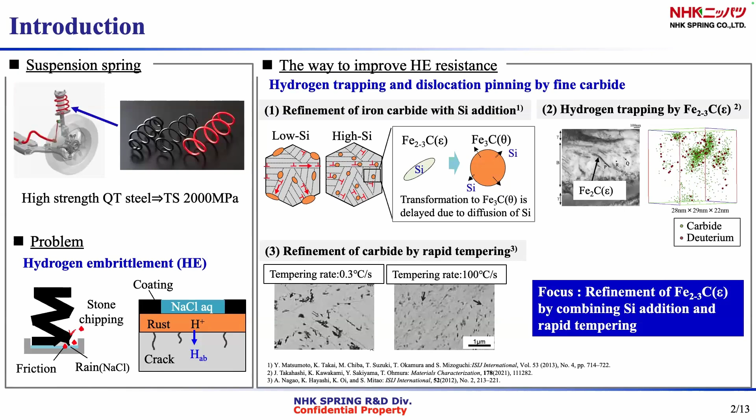Suspension springs have been required to be lightweight to reduce CO2 emissions. Springs use high-strength martensitic steel with tensile strength of 2,000 megapascals. The problem of the spring is hydrogen embrittlement due to corrosion. One of the ways to improve hydrogen embrittlement resistance is hydrogen trapping and dislocation pinning by fine carbides.

We focus on the epsilon carbide in this study. It is known that when silicon is added in steels, the carbides finely precipitate within grains. Silicon is said to delay the transformation from epsilon carbide to cementite. Recently, it has been reported that the epsilon carbide may have hydrogen trapping ability. Additionally, the carbides have been refined by rapid tempering. Therefore, we focus on the refinement of epsilon carbide by combining silicon addition and rapid tempering.

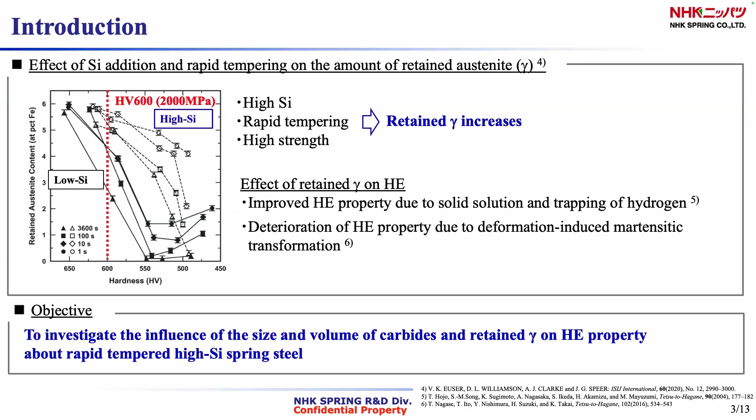On the other hand, it has also been reported that the amount of retained austenite increases when silicon is added and rapid tempering is performed. The effect of retained austenite on hydrogen embrittlement includes improvement in its property due to solid solution and trapping of hydrogen, or deterioration due to deformation-induced martensitic transformation. Therefore, the objective of this study is to investigate the influence of the size and volume of carbides and retained austenite on hydrogen embrittlement property of the rapid tempered high silicon spring steel.

Now I explain the experimental method. Two types of spring steels with different silicon content were used. The heat treatment is shown here. In order to eliminate the grain size differences, induction heating, IH, was used for quenching, and IH and furnace heating, FH, were used for tempering. The specimens were three types of steels with different silicon content and tempering speed. Although the grain size and hardness were the same, the Charpy impact value tended to be highest for

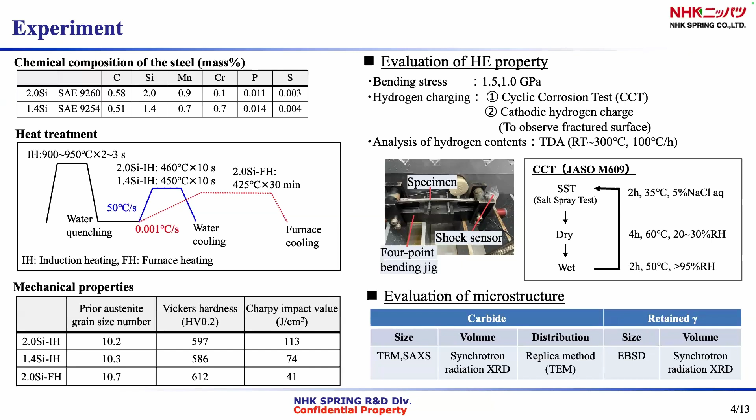the two silicon IH steel. In order to evaluate the hydrogen embrittlement properties, a 4-point bending test was conducted under a cyclic corrosion test. The fracture life was measured by detecting the electrical signal output when the specimen fractured. The cathodic hydrogen charging test was also conducted, and we observed the fractured surface. The size and volume of carbides and retained austenite were measured using X-rays, synchrotron radiation, the replica method, and EBSD.

I will move on to the results. This is the result of the hydrogen embrittlement property of each specimen. It was found that the two silicon IH steel has the longest fracture life. At the same tempering rate, high silicon steel has a longer fracture life than low silicon steel. At the same amount of silicon added, IH tempering increased the fracture life by 2 to 10 times compared to FH tempering. And the two silicon FH steel fractured in a short time. Therefore, it was expected that there would be a large difference in microstructure compared to IH tempered steels.

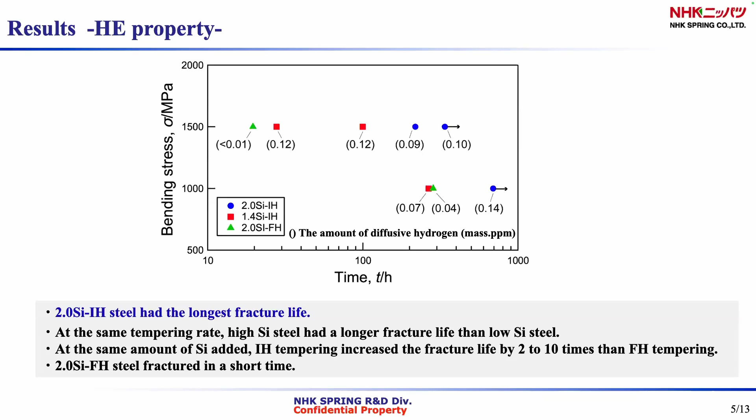These are the fracture surfaces of the specimens. It was found that the origin of fracture for IH tempered steel was an inclusion or a flat facet. According to previous research, in the case of austenite-containing bearing steels, the flat facet is said to be a plane of martensite, which is formed by austenite transforming through deformation into martensite. I will explain the flat facet in detail in the discussion part.

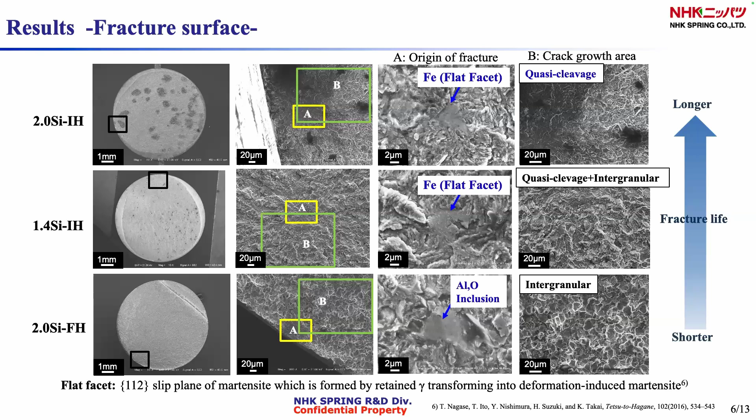On the other hand, the origin of fracture for the two silicon FH steel was not a flat facet but an inclusion. And the shorter the fracture life, the more intergranular fracture occurs. Next, I will explain the characteristics of the retained austenite and carbides.

It was found that IH tempered steel contained more retained austenite than FH tempered steel. Among IH tempered steels, the one with the highest amount of silicon had the highest amount of retained austenite, which is consistent with previous research.

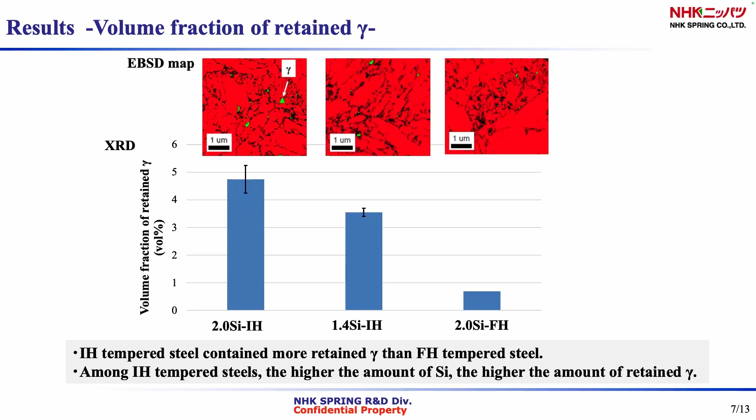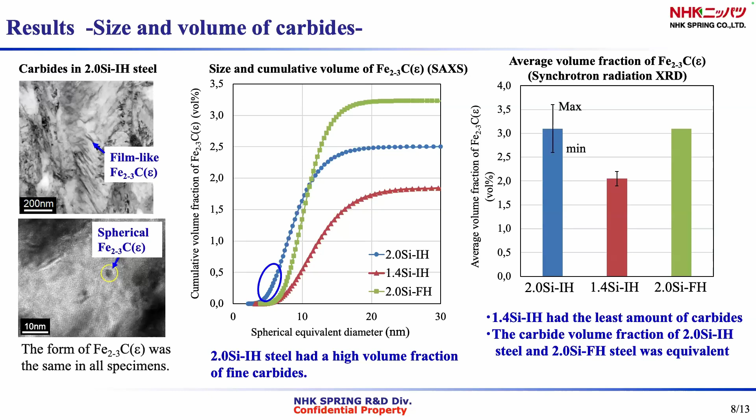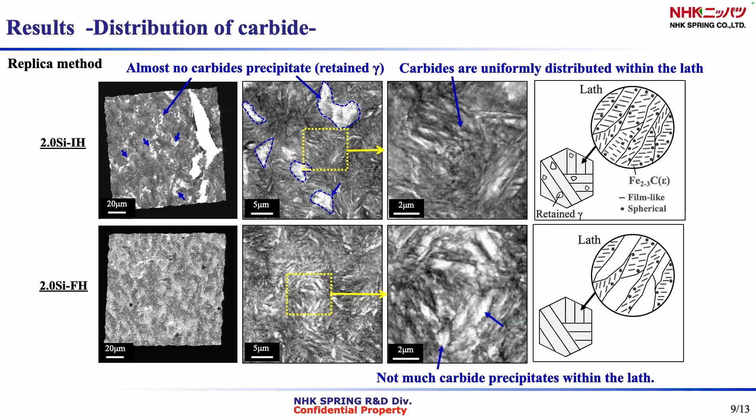We also observed the distribution of carbides for 2.0Si-IH and 2.0Si-FH steel with the replica method. In 2.0Si-IH steel, there were some white areas where the carbides did not precipitate much. This is thought to be retained austenite. On the other hand, when looking at the areas except the retained austenite, many carbides appear to be uniformly distributed within the laths. On the other hand, in the 2.0Si-FH steel, there was less retained austenite, but the lath shape can be seen clearly. In other words, there are many laths where the carbides did not precipitate much.

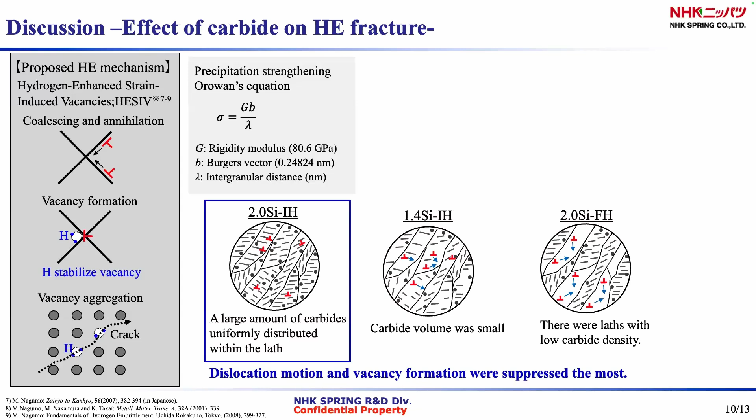This figure shows the distribution of carbides in each specimen. 2.0Si-IH steel has a large amount of carbides, which are uniformly distributed within the laths. In contrast, in 1.4Si-IH steel the carbide volume was small. 2.0Si-FH steel has many laths with low carbide density. Therefore, we expected that in 2.0Si-IH steel, dislocation motion and vacancy formation were suppressed the most.

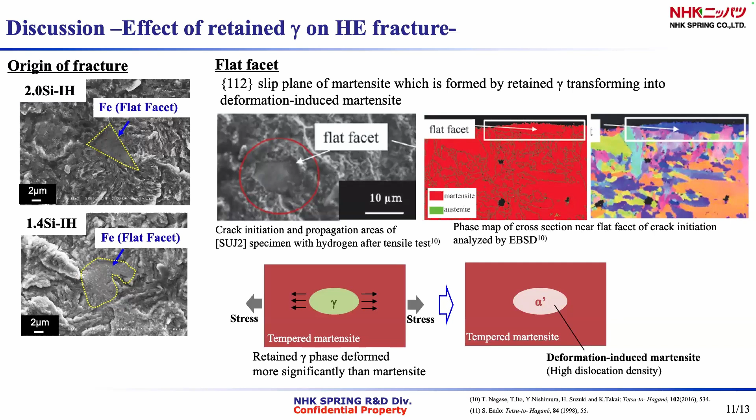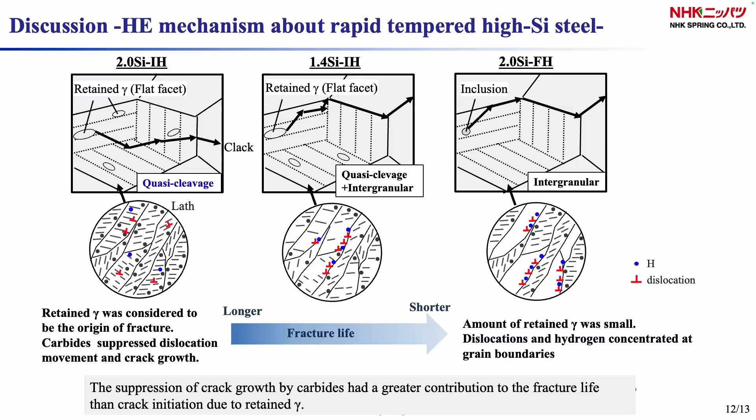These are the conclusions, and thank you for your attention.